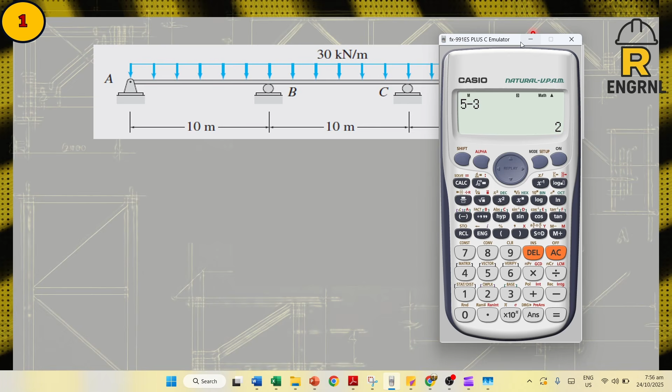So let's learn about the concept. Bago natin sagutin yung tanong na yun, try nyo munang tignan yung figure na to. Yes, you will say that this is indeterminate with 5 reactions sa support. Dito dalawa, tatlo, apat, lima. So if you will compute the determinacy, it's just R minus 3. So meron kang second degree na indeterminacy. Hindi masosolve yan ng it's just 3 equations of equilibrium.

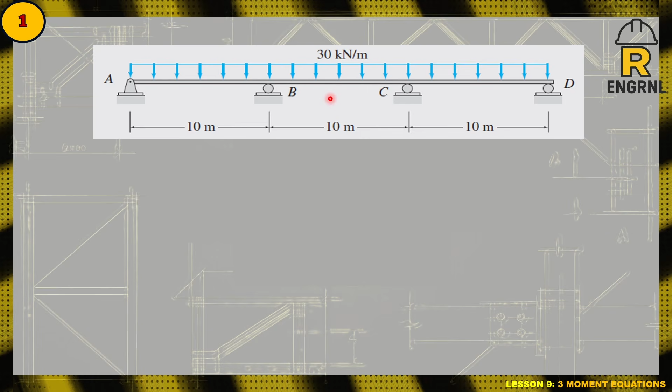So yun ay isang dahilan kung paano mo gagamitin yung, o kung kailan mo gagamitin yung 3-moment equation. Kapag nagsosolve tayo ng continuous beams, na may indeterminate, okay, tapos yung more than 3 ang reactions. So 3-moment equations. Dinevelop to ni Clapeyron noong 1857, to analyze continuous beams. It relates the bending moments at three supports, and ensures that the beams, slope is continuous.

Sinabi niya at three supports. So, kaya siya tinawag na three-moment equation kasi nag-a-analyze siya per two segments or per two spans. Ito meron tayo ditong three spans. So, ang siste, uunahin mo muna si ABC. Pag nakuha natin yung dito, two spans, na-evaluate natin, punta tayo sa next two spans. Ganun yung gamit ng three-moment equations.

So, kung magkakaroon man to ng disadvantage or inconvenience dun sa part na yun na iisa-isahin pa natin. So, may method din naman na kayang isolve ng simultaneously yung buong continuous beams. So, hanggat maaari, kung limited lang naman sa dalawang span, hanggang tatlo, yung ating sinusolve na indeterminate beam, eh pwede mong gamitin si three-moment equation.

Ngayon, ang tawag dun sa continuous beam na isa pang method is yung tinatawag na moment distribution method. And i-upload din natin yun dito sa channel. So it relates with that bending moments at three supports. So kapag nakakuha ka ng moment sa mga supports, ibig sabihin, madali na lang isolve yung support reactions. So yun ang goal na nitong method kaya siya tinawag na three-moment equation.

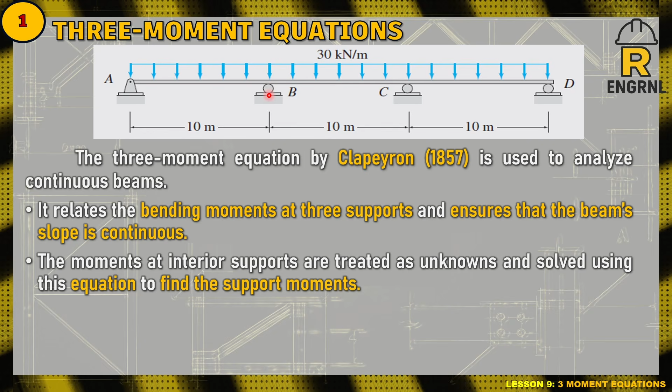Ngayon, the moments at interior supports are treated as unknowns, o tinatawag din tong redundants. Kasi series of moment na pare-parehas lang yun nandito. Kagaya nitong sa B, dapat may moment ito dahil tinuturing siyang fixed support dito. Kapag kinat mo to, magkakaroon ka ng moment. Unlike dito sa A, walang moment dito. So obviously, kung 3 moment ang kukunin natin, moment sa A, moment sa B, moment sa C, ang moment sa A is 0, while the moment at B and C meron.

Okay, so ganun din naman kapag kinuha mo na yung span BC and CD, may moment sa B, may moment sa C, pero walang moment sa D. So these are the unknown moments, the interior supports. And solve using this equation to find the support moments.

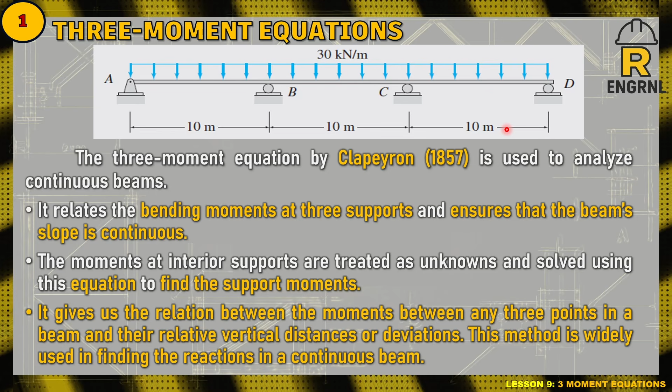Ang haba ng explanation nito sa book, pero ganito ko na lang siya explain. And lastly, gives us the relation between the moments between any three points and their relative vertical distances and deviations. So meron kinalaman yung settlements sa bawat supports and sa pag-derive ng ano na to, ng method na to. So this method is widely used in finding the reactions in a continuous beams talaga. So marami nagsasabi na ano to, madali.

Okay, so tingnan nga natin. So meron tayong derivation nito. And technically, napaka ka-haba, sabihin natin haba kung paano to dinerive. Gamit din yung area moment method, okay, ng deflection dahil nga may settlement ito eh. So depende din sa elastic curve. Pero for the sake of this lesson, I let you go to a website na dinerive ito ng maayos. Pwede rin naman natin gamitin yung ating book. So itong series na makikita nyo is the solution to derive it.

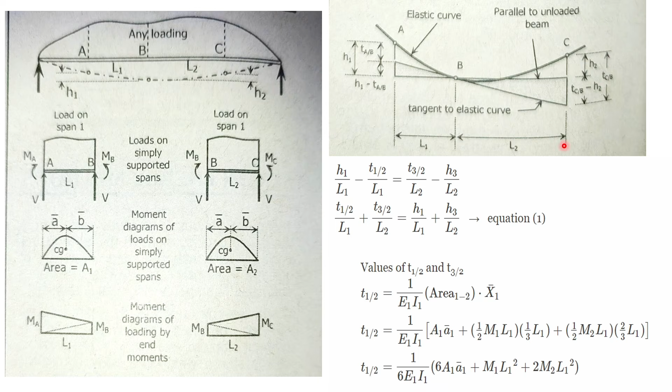Gamit ang area moment method, okay, nakuha siya ng ratio in proportion, geometry, from the settlement it created at saka deviation. And then na-create niya ito, until they solved it, okay, to this form. Wherein E and I is not constant here. So may mga series of, o may effect yung inertia nito. Tandaan na, may effect yung inertia nito.

While may makikita kayong variable A1, tapos yung barred A1, A2, barred B2. Ibig sabihin ng barred are the moment arms. And yung area is the area from the moment diagram. Okay, so dahil nga nag-area moment method, as you can see, meron din H1 and H3 which is yung settlements. If the settlements are given, marerelate siya sa equation. So, this is the general form.

At kung titignan natin yan, medyo nakakaano yan, nakakaugta, ang haba, di ba? Then, meron tayo dito, if E is constant, marireduce yung tingin natin sa equation. Nawala yung E dito kasi napunta dun sa taas. So, paano magiging constant yun? Madalas mangyari yun kasi ang material naman natin sa continuous beams ay iisa, madalas. Bihira naman yung magkadugtong, ng magkaibang material like concrete and steel. So, ngayon, pag daw constant si E at si I, okay, pati yung I sa ilalim, mapupunta na sa kabila. So, 6EI dito. Okay, so medyo gumanda na yung tingnan, yung formula. Tama? As long as the E and I are constants. So, again, we have two reduction na dito.

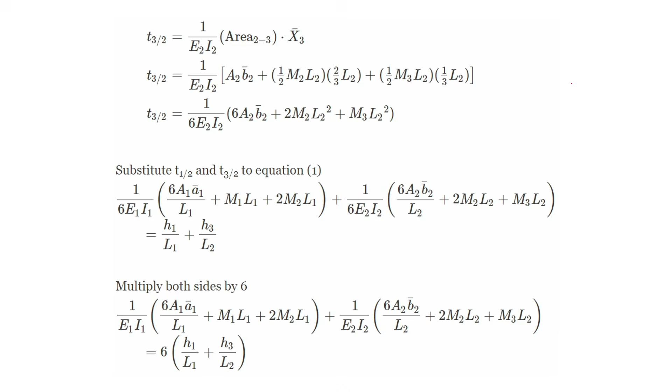Sa application ng three-moment equation sa continuous beams, points 1, 2, and 3 are usually unsettled supports. Nung dinerive yung formula, may settlement dito sa supports, so bibigyan ka or susukatin yan. Si H1 and H3 should have the value, pero dahil maganda yung support natin, hindi madalas mangyari ang settlement. So if you theoretically disregard the settlement, it will be 0. Kung walang binigay na settlement, pwede mong i-treat as 0 yung H1 and H3 with EI constant. So ito na lang yung ating equation.

Actually, ito yung pinaka widely used na three-moment equation. We'll define that M1, L1, or if you have mnemonics, the A, B, C. Moment at 1, times L1, 2M2, L1 plus L2, plus M3, L2, plus this factor. Pag ako nagtuturo nito, ang tawag ko dito ay si Batman. Para may konting mnemonics - si Batman, then si Bart A, and laging mayroong kanang kamay si Batman, si Robin. So BR - nasa kanan si Bart B, nasa kaliwa si Bart A. R stands for Robin, for right, kanang kamay ni Batman. So, the formula is this.

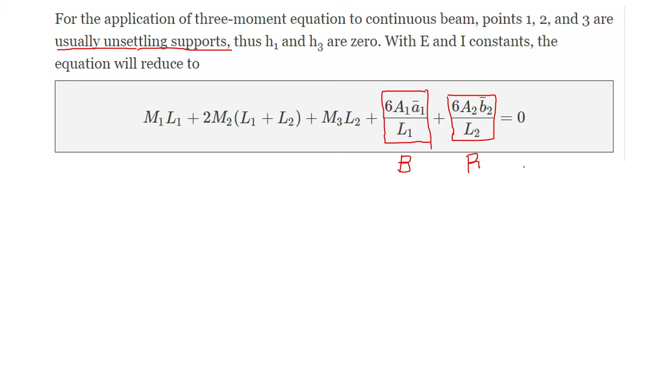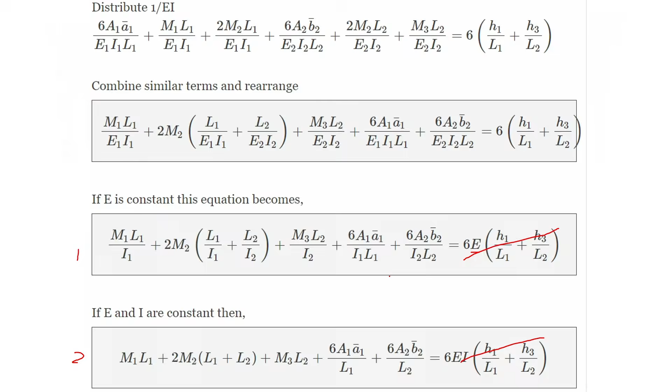Ngayon, hindi natin kailangan yung I and E kasi nawala siya sa equation. Pag meron naman na given na E and I at sinabing constant lang yung E, ang maaalis lang sa equation is yung E - ngayon gamitin mo yung I. I-divide mo lang siya ng I sa corresponding moment niya. Hindi siya disregard - magsasample din ako ng kagaya nun. So for now, let's familiarize first the use of this 3-moment equation.

Sundan natin, let's go. Meron tayong support reactions - nilagay niya na lang yung support reactions, R1, R2, R3, technically 1, 2, and 3. So using this 3-moment equation sa supports, ang redundant ay nandun sa number 2.

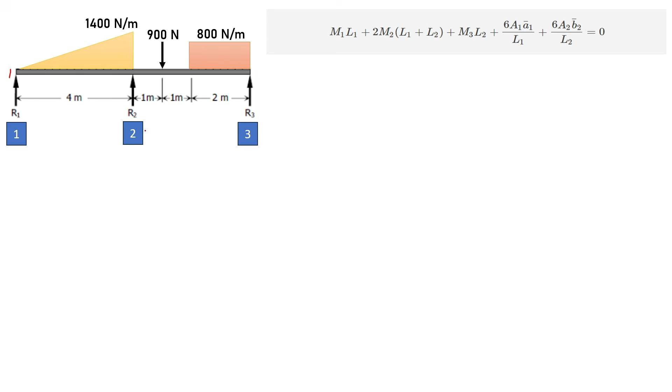Okay, support 2. Technically, you can see that M1 here and M3, there's no moment on that, kasi ano siya, free end. So the support there, sabihin na natin roller or pin, unless fixed support yan. So M1 and M3 is 0.

So ang ina-expect natin, we will first solve the moment at 2. Mawawala yung M1, L1, at L2, M3, L2. Tingnan mo yung dapat, yung L1 mo na tinutukoy is yung 4. And yung L2 na tinutukoy dito sa next span is also 4. 1 plus 1 plus 2, 4.

Then you can now use your Batman and Robin, gamit yung table natin. I-add mo lang siya dito. Maganda rin na isulat mo na lang B and R kaysa isulat mo to ng medyo maraming ink, lang din ang magagamit mo dyan. Okay sa akin yan, basta naintindihan mo na ito yun.

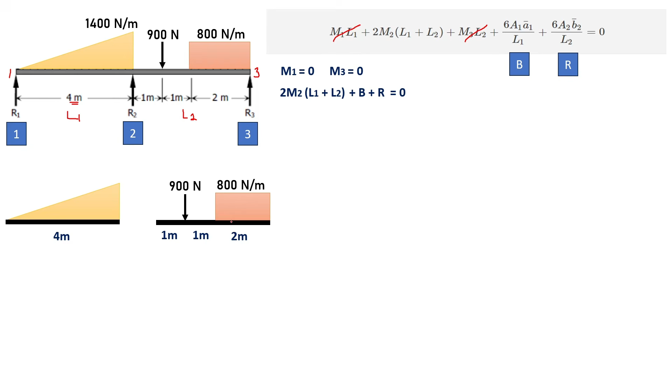Okay, iwalay muna natin yung mga loads, so those spans. Ang loading ni first span is just triangle, increasing or the highest slope is nasa kanan. Magkaiba yung papunta naman siya sa kabila, magkaiba yun, yung titignan mo sa table. And this one is the combination.

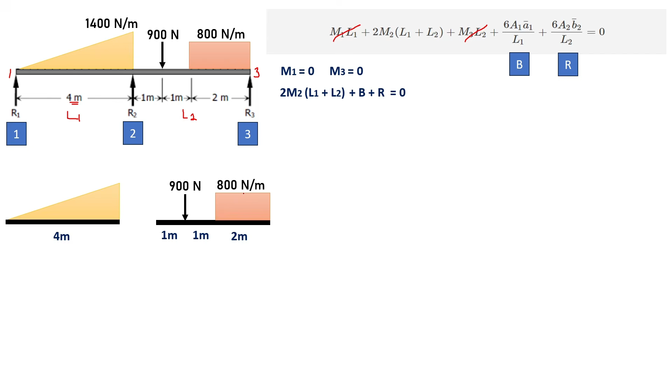Pag nakakita tayo ng span na may combination loads, ayan, gamitan natin ang tinatawag na superposition method, yung baga, iisa-isahin mo yung mga load, tapos pagsasamahin na lang natin. Okay, so use the table. And for these cases, ito yung magagamit nating tables. Para sa triangle, going to the right, okay, ito yon, gamitin natin dyan.

Yan, and kapag ito naman, dalawa magagamit natin. Isang para sa direct load, yan, yung unsymmetrical loading, direct load. Tapos ito, ano kayang gagamitin natin dito? Ito ba? Okay, hindi ito ang gagamitin mo kasi full yan, this is for full uniform load. Ang gagamitin natin for this span or 4 meters of span is ito, kasi hindi naman full yung uniform load and this is arbitrarily positioned.

So paano natin yan gagamitin? Unahin natin, to solve for your Batmans. Si Batman ay applicable lang sa kaliwa. So ano ba yung span na nasa kaliwa? Ito, si segment R1 and 2. So gamitin natin to.

Nakuha yung triangular, so technically ito gagamitin ko: 8WL cube over 60. Medyo maliit, 8WL cube over 60. So ang purpose is to get this 6A1 bar A1 over L1, pero derived na siya, so ito yung gagamitin ko. Substitute 8 times 1,400 newton per meter times 4 cube over 60, and we have 35,840 over 3.

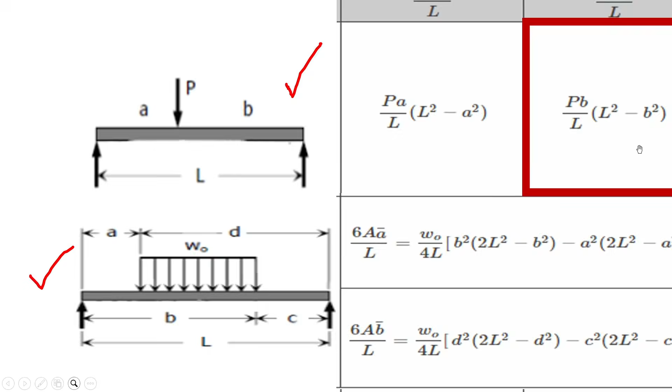Okay, itong loading na to, applicable for 900 newtons, so kalimutan nyo muna sa 800 dito, ha. Superposition ang tawag dito, so to use that, ang gagamitin ko si Robin. Dito tayo, yan, PB over L, L squared minus B squared. B stands for this, so this time ang A dito is 1, ang B ko is 3. Nagets? So 1 plus 2, 3. Ang P mo is 900, ang L mo is 4.

Okay, so by superposition, i-add mo naman yung para sa 800 newton per meter, kalimutan mo naman muna yung 900. Yan, then i-add mo lang. So ang gagamitin natin, ito, Robin, ang Robin nito. Medyo mahaba, so ito, tuturo ko kung paano ilalagay yung mga details nito.

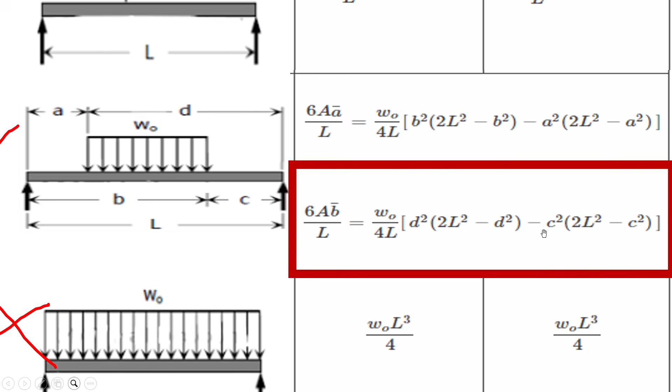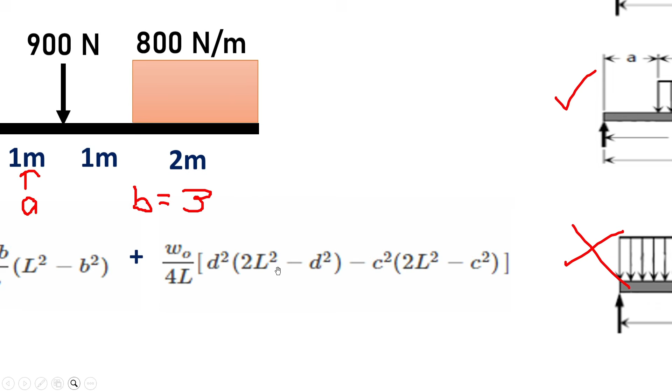So tingnan muna natin yung mga details, A, B, C, D. Si L, alam mo na 4 yan. Tatandaan mo lang na yung D natin is mula doon sa dulo, dito, hanggang sa dulo ng uniform load. So ito yung from dulo to dulo, this is your D. And your A is yung natitira, basta ito yung A mo.

Okay, yan yung natitira. And yung B mo is kabilang dulo, so B stands for your dulo naman ng kabila. So B is equal to L. And your C is 0, C is 0 kasi wala namang natira dito.

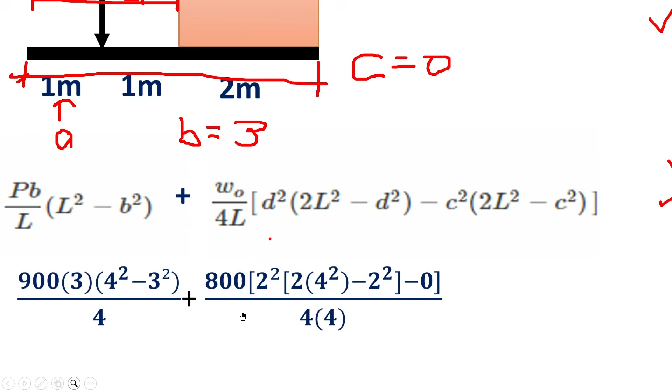Okay, so technically, lagay na natin lahat para sa 900 newton, 900 times 3 times 4 squared minus 3 squared over 4. While dito, yung W, O, okay, nawala. Yan, yung WO is your 800, and your 2 is yung D. Yan, 2, 2 squared, L is 4, 2L squared, ang naka-times ng 2 yung L squared, ha.

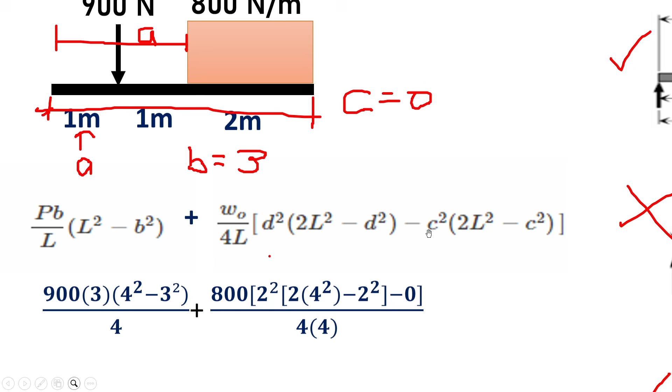Okay, minus 2 squared ulit D, and yung C mo, 0, kasi 0 na tong term na to. So wala din tayong B, no, kasi pang ano yan, Batman. Okay, so over 4, 4.

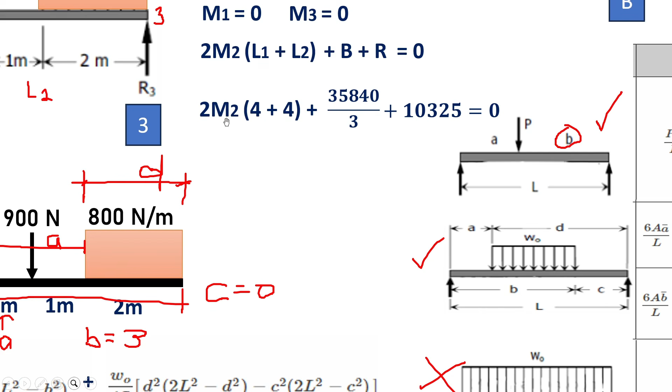O diba, substitute mo na. We have, substitute, compute mo na. 10, 3, 2, 5. O diba, ang ganda. And we have a single unknown na lang dito, M2, sa pool na si M2. If you calculate that, using calculator of course, no? Second is M2 minus or negative 1391.98 newton meter, or 1.39 kilonewton.

Negative. Okay, you will expect a negative moment at fixed support, no, kapag gravity loads ang binibigay. So tandaan kasi nandun siya sa fixed.

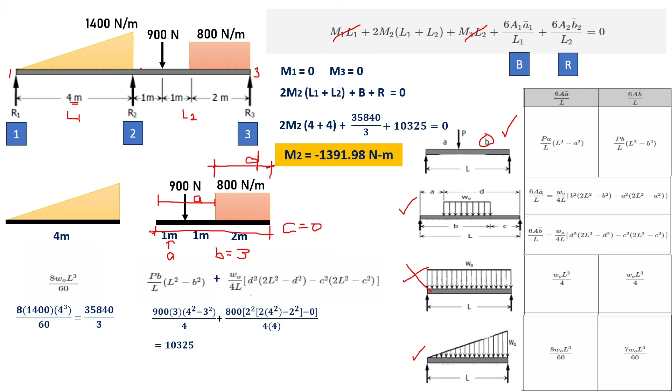Is it continuous? So how do you find the three-moment equation now? This is very easy, because E is constant, I is constant, and there's no settlement at support. So that's it for now. But we're not yet done.

Let's look again at our beam. To get the reactions R1, R2, R3, we'll treat R2 as redundant. So first, let's position that moment, which is negative, as stated. Negative moment means the moment here should be counterclockwise, and to counter that, you should have a clockwise direction here. Just translate that to the other side, oppositely directed.

So when we get here, you check your support reactions. R2 remains here at joint 2, and it has left and right R's. If you add these, it will result in your R2. That's how we get our support reactions, which is also what we used before for shear and moment in cutting.

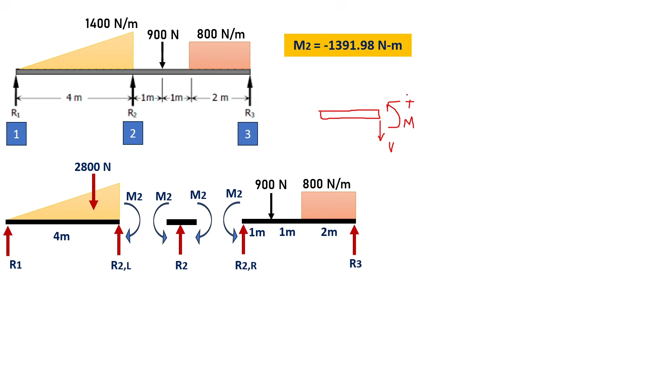If we cut a left member, remember the sign convention is counterclockwise positive when you're on the left, and your shear goes downward. That's our sign convention. So left member: positive moment, shear downward - counterclockwise positive. Okay, you can say 'counter positive, left.'